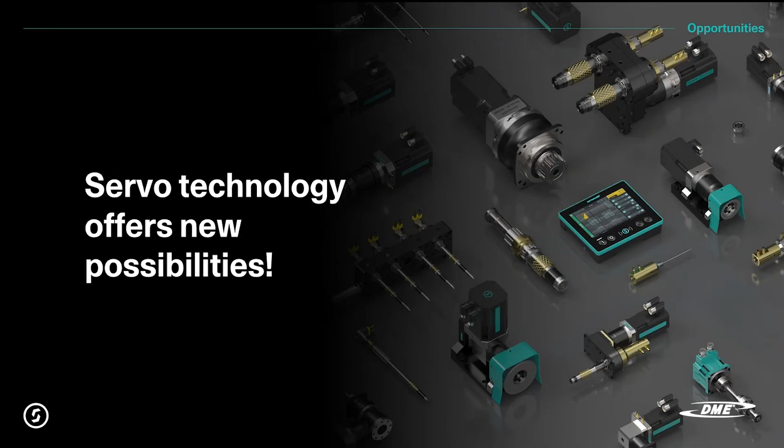We help you at the very beginning. Now, obviously, those of you who are already customers of ours will already know about the support that we can give. But those who don't, and particularly those who perhaps haven't used servo yet, or they're using their own servo, buying their own servo motors, building their own gearboxes, building their own cores, rack and pinion systems, or whatever.

What is it that makes us so special? Why should you actually come to us instead of doing all the design yourself? Well, firstly, we will support you in the actual...

...decision of exactly what unit, what size, what design, what concept to use. There are many, many ways—those of you who are in mold design will know yourselves. You can design a mold to make one particular plastic component in 10 different ways easily. They would all work, but you need to find the most efficient system. And we are there to support you, help you make the decision for which motor to use, which gearbox to use, which concept.

Do you want a rack and pinion to unscrew cores? Do you want a gearbox? How many motors should you have? We'll make the calculation at the beginning—will it work out exactly the demolding forces required?

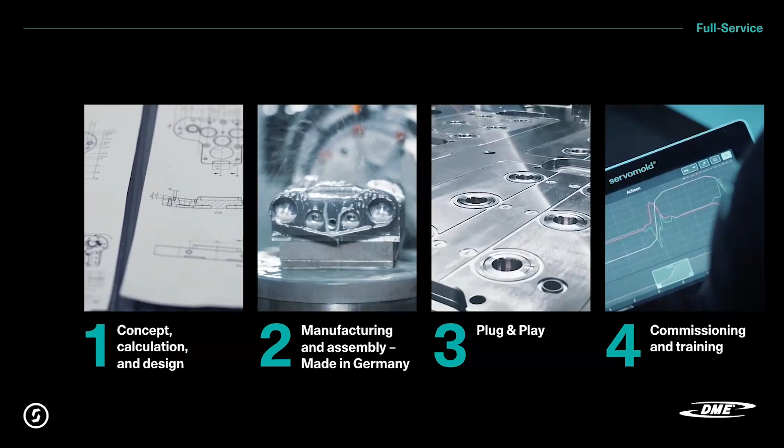The second point is manufacturing and assembly made in Germany. We're very proud to say that all of our gearbox equipment - and at the end of the day, this is really what we do, we marry together an electric motor, a spindle system, with our gearbox. We have many, many varieties of gearboxes, and that's what we do best, this is what we make the best of. We make these gearboxes in-house in Germany, in a little village called Erbach in Odenwald. You can look it up on Google Maps to find out where it is. It's very easy to get to, as long as you don't mind driving through lots and lots of villages. But we make everything there, and all the components that we fit to our gearboxes and attach to the whole system is purchased in Germany.

It's Germany or EU. Of course, we can't always guarantee bearings, seals, where the actual company we're buying them from, where the manufacturing is, we don't really know. But we have close contact with all of our suppliers, and intimate contact with our suppliers over many, many years now.

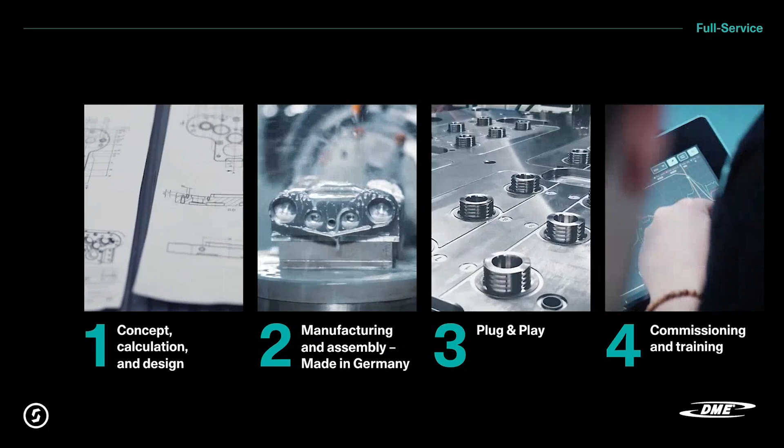Third position, plug and play. It's a very well used expression, and I think we all know how that can be - plug and play when you buy yourself a printer and you plug it in at home and it doesn't usually play. We really do endeavor to give you plug and play, but there are always anomalies.

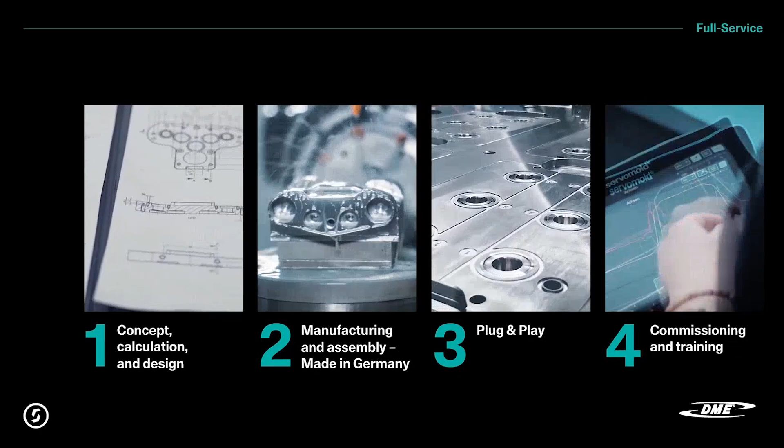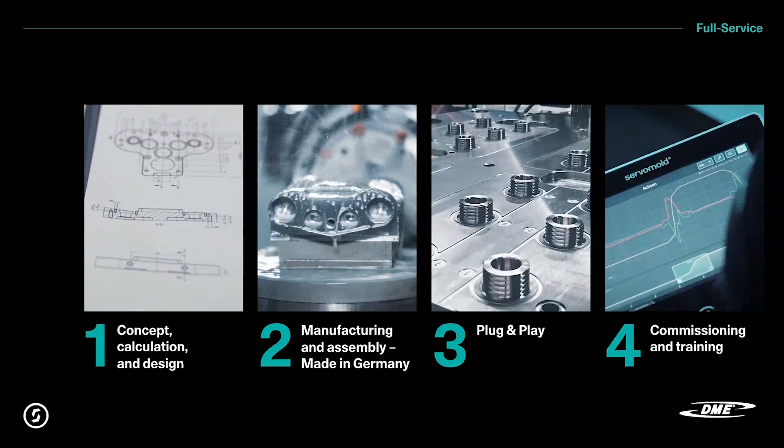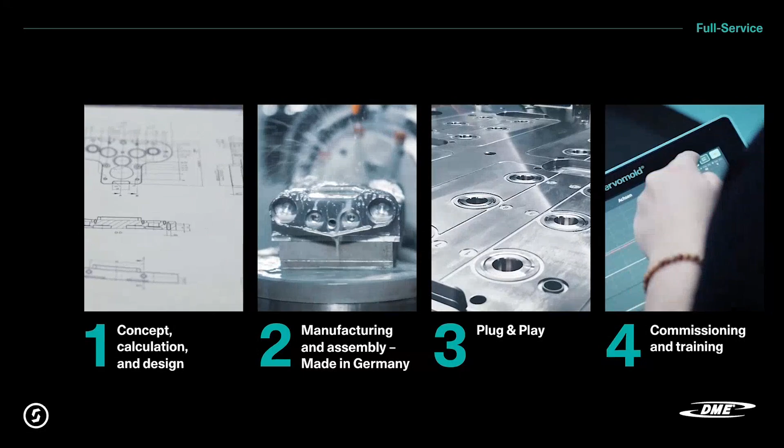There are always applications where you're going to need support from us, which takes us to number 4, the commissioning and training. This can be done through DME. DME have engineers who can support you in-house, they'll come to your factory, your mold shop, or your molding shop, and help you commission this system and get it up and running as efficiently as possible. On top of that, we can also support you online. We'll do Teams calls, we'll have cameras set up, and we can help you set up your system as efficiently as possible and give you the support that you need at the very beginning of what would be, in your first idea, quite a complex system.

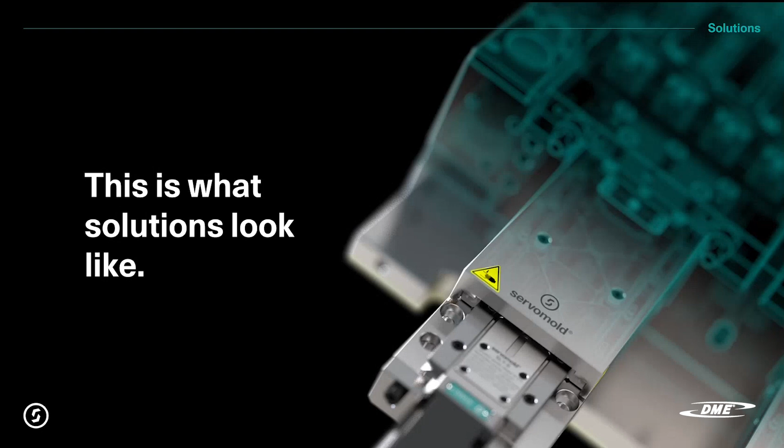Now that was the overview, and I want to go into a few solutions that we have. But at the end of the day, whatever solution it is, we're aiming to deliver 3 results: precision, repeatability, and simplicity. For any movement that you have in an injection mold, we don't want to make things more complicated. We don't usually make it cheaper, and I really need to point that out.

You don't buy an electric system instead of a hydraulic cylinder and think you're going to save money, you as a mold maker. The end customer, your customer, they will save money, they will save a lot of money. This is the position where you need to be, and this is where we want to help you understand what we've got and help you explain that also to your end customer, the molders - what are they getting with these systems and these solutions?

So first off, we've divided our offerings into 3 subsections. We have the linear actuation - this is the movement of slides, racks on a rack and pinion system. We have unscrewing rotational devices - this can be unscrewing cores, this can be index plates, anything that needs to be moved in a rotational manner, that is our second section. And then, equally as important, and without it the other 2 aren't really going to work, is our controls, controllers, control systems - all of it from us.

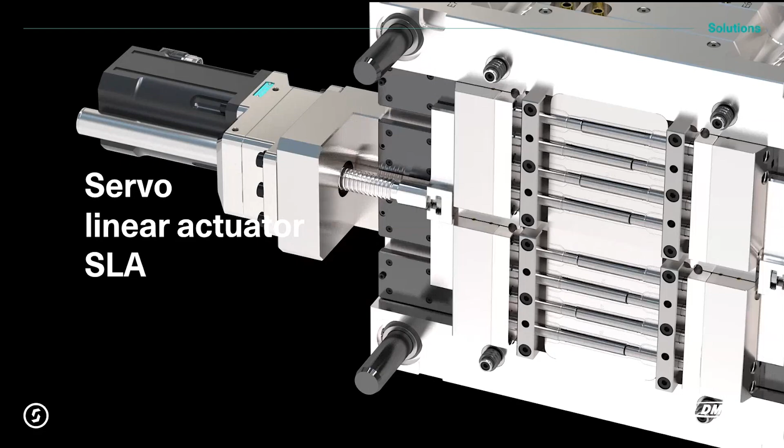I'll kick off now with linear. I'll let this little video run a bit, hopefully it will smooth up on my laptop or my screen here. It looks great, but it's got to go a long way - quite a few kilometers for it to travel until you get it, so hopefully this is smooth, at least on the second or third loop. But what we're showing here is, and it's quite a simple acronym, SLA - servo linear actuator.

So you have a servo motor, you have a gearbox, and you have a spindle. You can do anything you want with that, or whatever you think you need to do in an injection mold. We're showing here a very simple slide movement. This can equally be done with a hydraulic cylinder, of course - nobody would say, well I'll take the hydraulic cylinder off and put an electric motor on because it's fun. There's got to be a reason for doing it, and the reasons are very, very clear.

If this mold is running in a clean room, then the electric motor is going to be a no-brainer. As a molder, you're going to demand that. As a mold maker, you will be demanded to use servo electric for your slide movements in clean room facilities.

We're seeing a lot of customers worldwide who are buying more and more full electric injection molding machines. Unfortunately, there's the odd application, and I hope I don't step on anyone's toes here, where they've bought a very nice full electric Fanuc machine and fitted a little hydraulic pump underneath to keep their hydraulic cylinders running. This is a low investment, and I completely understand the motivation to do this. Long term, it's not the best solution.

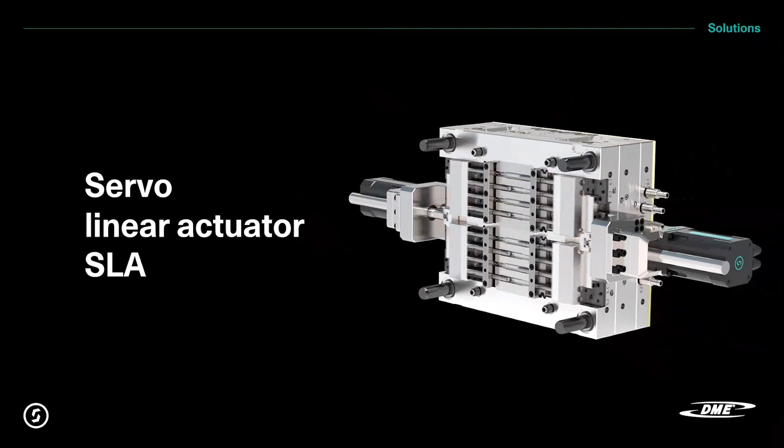We've done this with many of our distributors worldwide, where we've supported and explained in detail to the molder what they're getting, and then they're far more willing to make that jump to full electric. And I'm absolutely convinced, and it's happened time and time again, once a molder has made that jump and moved to electric, they won't go back to hydraulic. This is the way forward.

So enough of me ranting on about why. What we've got now is an SLA—and again, just came into my mind actually, I don't want to just carry on blabbing on. This is an overview.

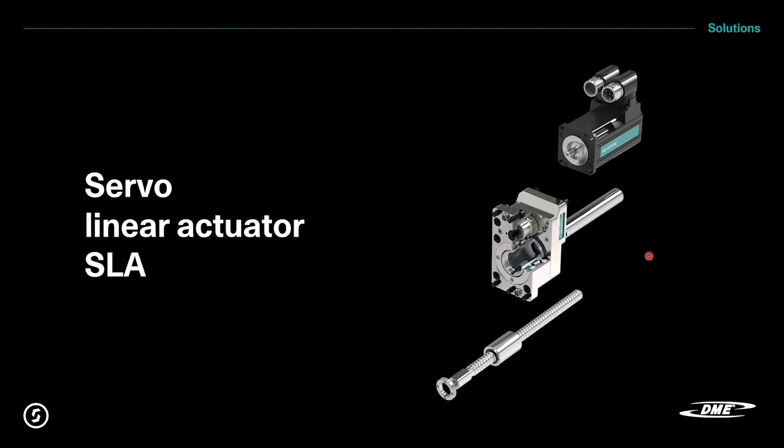So, as I mentioned, we concentrate on what we do best. This is the gearbox, the actuator itself, and this is an example of one. There have been many updates of this particular unit. This is nearly the latest one, but I can't keep up my presentations with the very latest, though I will be updating it. As far as the presentation is concerned, the concept is identical. We just have a few small iterations, but we're always trying to make the units we build as efficient and as low maintenance as possible.

The goal in building gearboxes like that, and this is where we are specialists, is to make these units as low maintenance as possible. What's low maintenance? Obviously, as everyone always says, it depends on the application. Of course, that isn't the answer you want to hear.

But if you're running in a clean room, for example, and you're moving a rack and pinion system, a couple of million cycles is easily within reach before any maintenance is needed. If maintenance is needed, many mold makers or molders will put down a mold service interval anyway, usually before 2 million cycles are up. Then a little bit of greasing will be done. You don't need to take these things apart, just do a little bit of oiling on the spindle nuts.

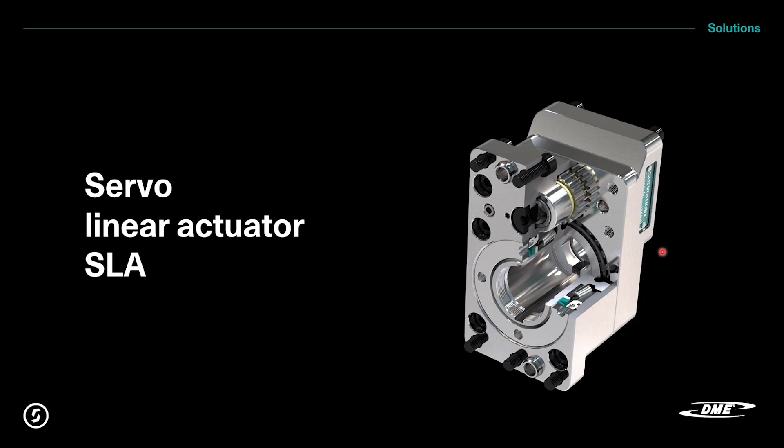We were approached a couple of years back by a large medical device manufacturer here in Switzerland. I'm actually sitting in Switzerland now. They were building molds with a lot of lift and strip concepts. Now, most of you will know what I'm talking about here. It would be a tubular plastic component, anything between maybe 40 millimeters and 100 millimeters long. These parts are usually within the body of an auto injector or a self-injecting device. This particular customer approached us.

We've been setting SLAs to move the slide. As you saw in the previous video, we attach it to the side of the mold to move the slides in and out. This particular customer said, yeah, that's all very well, but I still have to make the slides. There's a lot of parts in a slide to make it really accurate, with no free play, but it still needs to move, which is really difficult. And they wanted high accuracy for the cores, always in the exact right place.

We put our heads together, Servomold and this customer, and we came up with the servo linear actuator, the SLY. I'll let this video run a couple of loops, feel free to look at it. There are a few intentional design features put in here, not errors, because we have NDAs with our customers. We can't say exactly how mold designs are done, but we can support you, and we would need to support you.

You would require our support when using one of these SLYs, servo linear actuators. Now I'll move my laser pointer in here. As you see, you have a core retainer at the top.

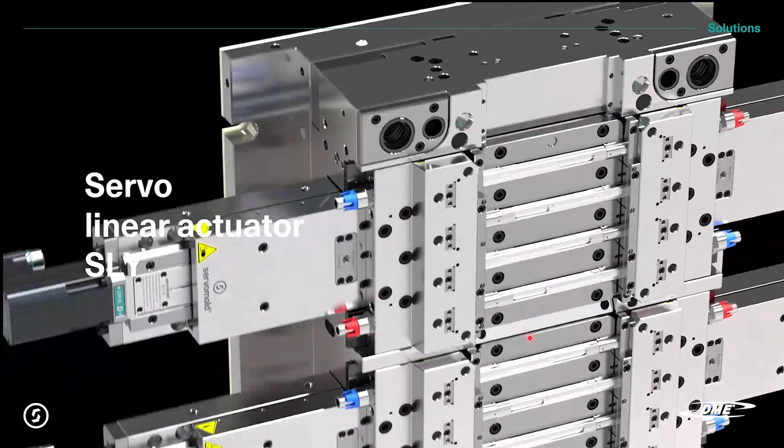That core retainer, obviously, we're using different length cores. We've got a short core on the right, long core on opposing sides. This was for reasons of balance, and demolding forces. By doing it the way it's designed, as you see in this loop, the forces for the left and right hand SLY are always going to be the same. It isn't that we have all long cores on one side or short cores on the other.

These are details we can talk about if this is something you think could be of interest to you. I'm a tool maker myself. I studied as an apprenticeship as a tool maker many years ago. I've been working in the plastic injection mold industry for many years.

The standard way for these sort of components would be to stand them up and put them in what we say in German, a form. This is basically slides, a left and right slide, with the part standing up on a core. You inject the part on top and then have a very long ejector sleeve pushing the part off. This makes for a very large mold, a lot of moving parts, and a lot of maintenance.

Not really the best injection point. Those of us in the injection molding industry know that the nicest place to inject would be as the part lays down on its side, on a thicker area. Particularly here, you can see we've got a very close cavity pitch. Sometimes if you have a needle valve system, you can't get such a pitch, and that's another reason why we've gone left, right, left, right. We've actually staggered the injection points so that the hot runner system is also staggered.

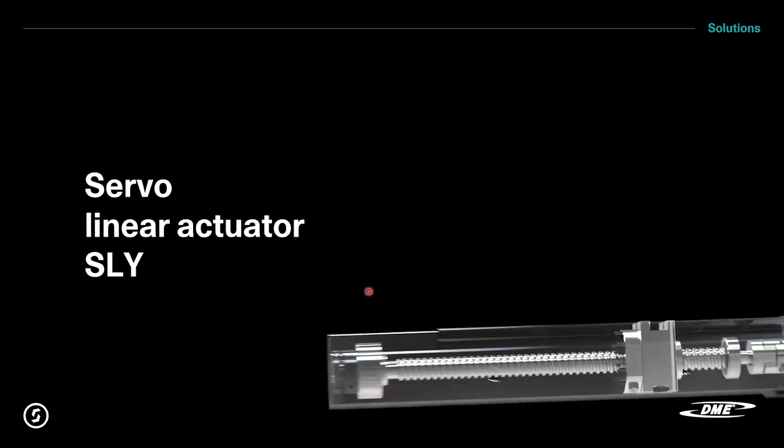We have a nice push drive driving that spindle. The spindle is retained at the front over another bearing, so it's very well supported on both ends. Attached to the nut, and to stop that nut from turning—otherwise if you just turn the spindle, the nut will go with it—we need to stop it. That's this nut retainer you see now, moving up and down a machined area in the bottom unit.

The top slide is attached and runs on needle bearings, supplied by the company Schneeberger here in Switzerland. They're preloaded bearings, so it's a preloaded guide. Because it's preloaded, there is no free play. The top slide running along that bottom slide has zero free play. We guarantee the position of that top slide on all areas to a maximum of ±8 micron runout.

Why does it need to be so accurate? Well, the idea is, if you have a lift and strip mold, you're pulling cores out of a cavity after being lifted, with parts being stripped off over a bush. There's no huge requirement for such high accuracy there.

However, when the mold is closed, when the mold is on its back on the workbench and you're fitting the whole mold, those cores need to slide out extremely accurately. The advantage of having these cores moving so accurately is that your core is pulled out with zero deviation, causing you very, very little issue.

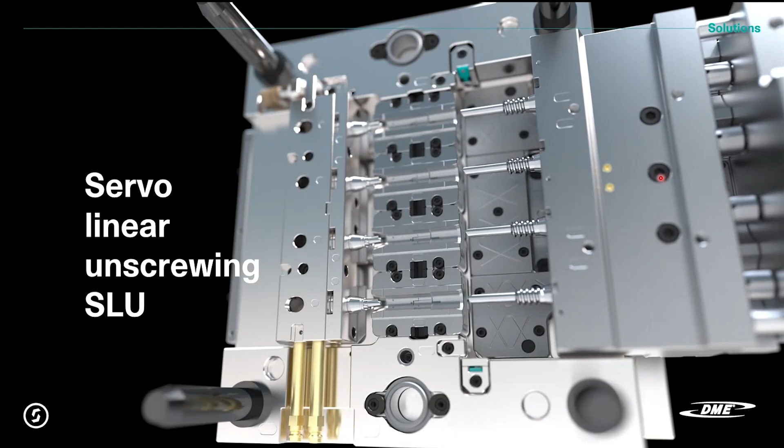So yeah, okay, you can do an unscrewing system, but we were approached and told it's got a rather nasty thread, and also the shut-off between the long core, which you see here, and the short core - it's really complex and quite delicate. With any unscrewing core, one of the challenges in unscrewing devices, which I'll get to in a few minutes, is positioning of the core.

As you know, the rotational positioning, the radial position of that core, the start position of the thread - usually if it's just a flat surface shut-off it's simple. But if you have a profiled shut-off like we had here, those cores have got to be extremely accurately positioned, which made the design of the unscrewing system extremely difficult and very maintenance intensive.

So we built this in conjunction with our partner, this 4-cavity prototype mold. This is the prototype - we're going to 16 cavity after this, but it was a prototype to find out, can we do this? We took an SLU, which I showed you before, and that sits underneath this top slide. On the top slide, which is the exact same top slide to any SLU unit, top and bottom slide, you see them very clearly here, we fitted what we do best - a little gearbox.

That gearbox is extremely simple. All it does is rotate the cores, nothing else. It holds the cores, and actually keeps them in a cooled core system, which I'll show you on the next slide, where we managed to have cooling inside this rotational core as well. But it gave us a massive advantage of being able to say, okay, these unscrewing cores, all they're going to do is rotate, nothing else.

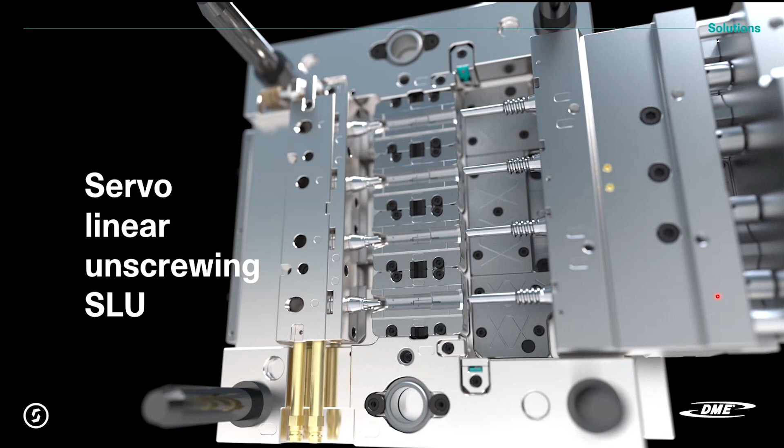And if we're only going to rotate them, then we can position them extremely accurately. They're positioned over a gearbox, so they can't move. They can't have a clamping plate where I have to adjust my core to a certain position because of a certain height. All the cores are identical length. Our gearbox core holders are identical lengths. Everything's the same. I'll move on, which shows a little bit of a cutaway here.

So now you can imagine you've got our SLU here underneath, bottom and top slides moving in and out. This gearbox, all it does is rotate these cores. While it rotates through electronic gearing in our servo controller, we move the top slide back at the same time that it rotates. Thus, we have our pitch. The gearbox at the top is always the same position - all it does is rotate. And then we pull it back electrically with gearing in our controller to make our pitch.

I'll go back to the first picture because there's something quite interesting when this runs. Hopefully it will run - all right, I've got to press a button here to make it run. Yeah, I can't make it run now. Bear with me, I'm going to go back another slide and then jump into that one, and that will make it start up again. So it's now running again.

You'll see that the actual rotating movement only happens when we're unscrewing. The second it's unscrewed out of that thread, we can speed up and pull it back - we just pull it back linearly over the SLU. We've programmed it to know exactly when that thread starts and stops, when it starts to turn and when it stops to turn. These are independent movements to the linear movement. We can control this.

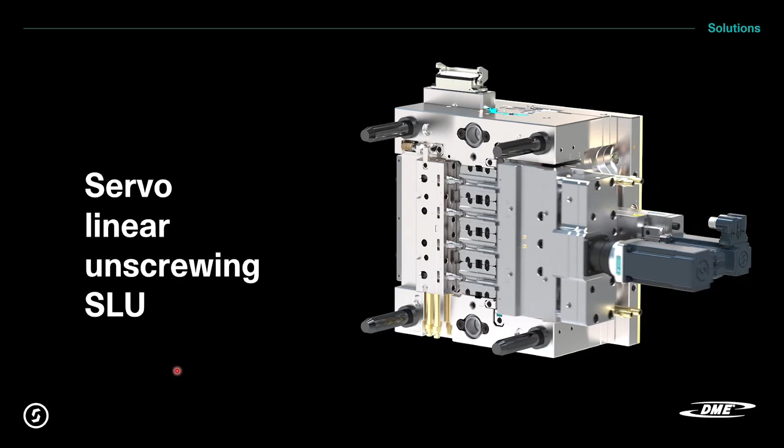This is the most accurate way of unscrewing a core. The more cores you have, as we all know, on a big mold, they all have to be on the exact same height, and if you have a profiled shut-off face, those cores need to be not only at the exact right height, but also in the exact same rotational position. This way, we do that.

Move back to here, and I'll show you again that the core holder - all of this is made by us in Germany. The white core you see here is made by the mold maker. That's what they do best - cores and cavities. Leave us to the gearbox and the electronics.

It's cooled - you can see here we have cooling. We have what we call a bell around the outside of the core holder. This is flexible. We show here only 4 cores, but you can have 8, as many as we can fit onto a SLU slide. We can make a wider SLU slide to accommodate more cores. The gearbox just gets longer because nothing changes.

We've integrated very stable - I've forgotten what I'm looking for now in English - bearings here, front and back. Angled bearings, I think, you guys will know what they're called. I've completely forgotten the name of them now. There's no adjustability on length, so therefore there's no margin of error. We've manufactured everything - this surface here is manufactured at a specific position.

They're all the same - it'll be a position to your shutoff. Then you make your cores. Obviously, as you can well imagine, there's a lot of communication between ourselves and yourselves when a project like this is started up.

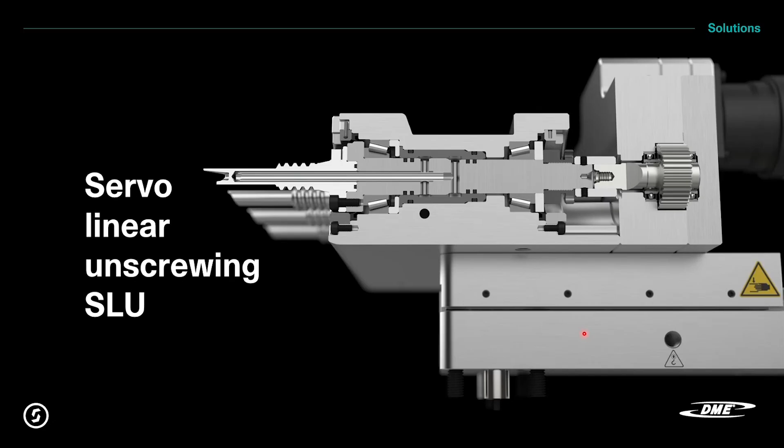I've got another 10 minutes. So, unscrewing units - this is basically where Servomold really started. This was like the grassroots for Servomold. We started this many years ago. The founder of Servomold, Thomas Meister, came up with this idea - unscrewing devices mustn't be so difficult as most people tend to think. There's got to be an easy way around this.

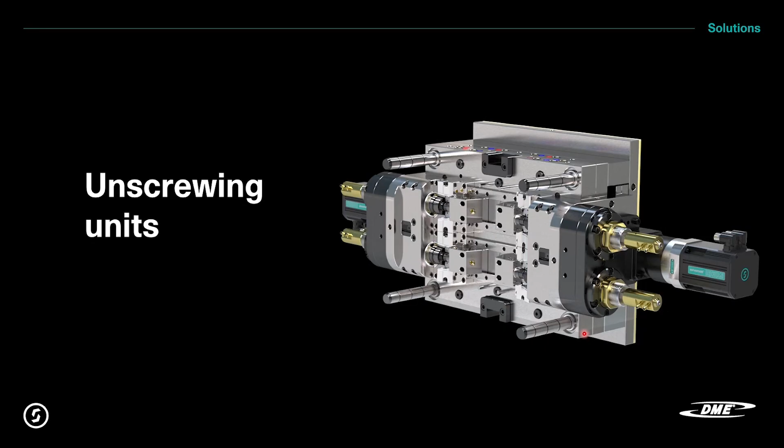I've got a nice little video here showing a mold that we built with unscrewing units. You can see here two of what we call SADs - they're a servo Ausschraub double, because there are two cores. But more importantly, this slide shows the threaded core systems.

This is our patented self-centering drive system for unscrewing cores. Every unscrewing unit or unscrewing device, whether it's a single unit or a huge mold with 64 unscrewing cores, always uses the exact same principle that we're showing you here. They can be bigger, they can be tiny - it doesn't matter what size. The principle is always the same. The concept is the same.

And that concept is very simple, as are most things that are extremely good and well trusted - a simple design of the gear wheel at the back. This is your drive wheel. This is either attached to a gearbox, driven by a gearbox, or driven by a rack, whichever system you're going to use - but this is your drive. That drive wheel is clamped and supported by two ball bearings in between the closing plate, so that gear wheel will spin freely but will not move in any other direction other than rotational.

Therefore, any pressure put on it by another gear wheel or a rack is all taken up in these bearings. We have a patented rib profile inside here, where the gear wheel goes over the lead screw. Through this design, the minute the gear wheel is driving that unscrewing core, it's pushing it into the center. By having the unscrewing core self-centering, you can imagine this gives you extremely low wear and tear where it matters, and that's over the lead nut.

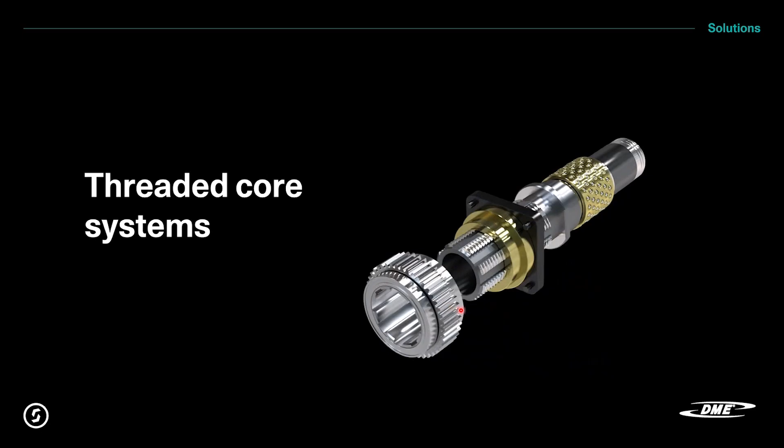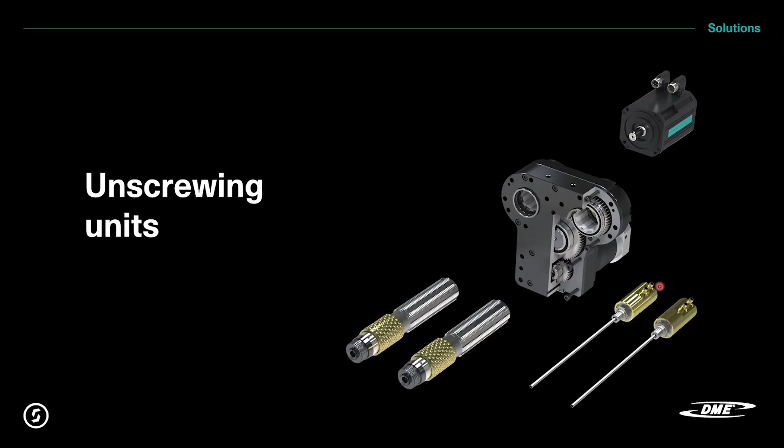This is a little breakdown of the double unscrewing device that you saw at the very beginning. We also show that we can supply rotational cooling units to go with it, but it's always the same design. We have here exactly the same patented design, but this time, instead of pulling these cores back - this is just another example of how one can unscrew.

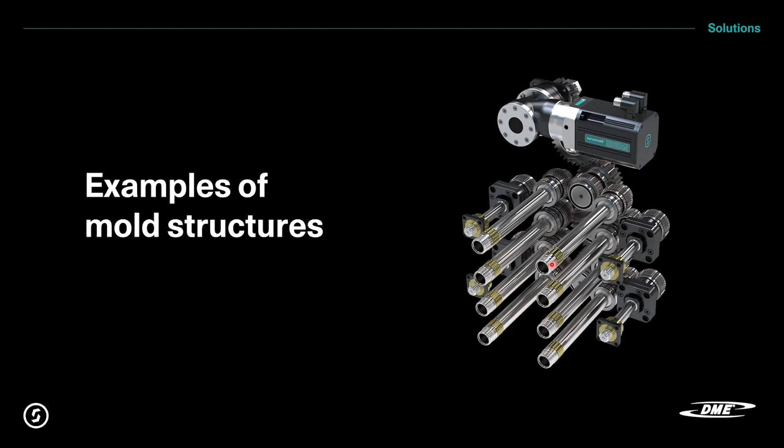There are two main ways really on a standard stand-up unscrewing system. This would be a traditional system for caps and closures. We drive the gears through the motor here, but then over the gear wheels, we drive these pillars in our patented unscrewing system. We drive the ejector plate forward at the exact same stroke, same pitch as the thread pitch on your cores. This would be the unscrewing method where cores are always the same length, always in the same position, far easier to adjust as far as shutoffs are concerned. And the ejector plate moves forward.

Alternatively, we go back to what I showed you at the beginning. We have a gear wheel driven by our motor at the top through idler gears, with gears at the back. All these little gear wheels are held over roller bearings, clamped between the plates, so all the sideways pressure is taken up by these ball bearings. We have a clamp plate holding the lead nut, allowing our cores to go forward and backward in an unscrewing movement.

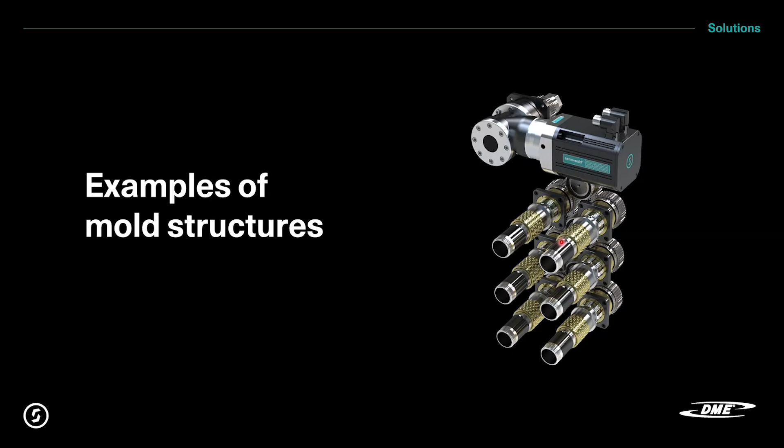I'm going to move on relatively quickly because time is running out and I don't want Mark to suddenly kick me out. I love this picture because it's a particularly simple looking mold - it's a 48 cavity luer lock, really standard in the medical industry. Luer locks, luer cones are standardized around the world with loads of different applications using this thread. This is a 48 cavity one, and we've made lots of molds identical to this.

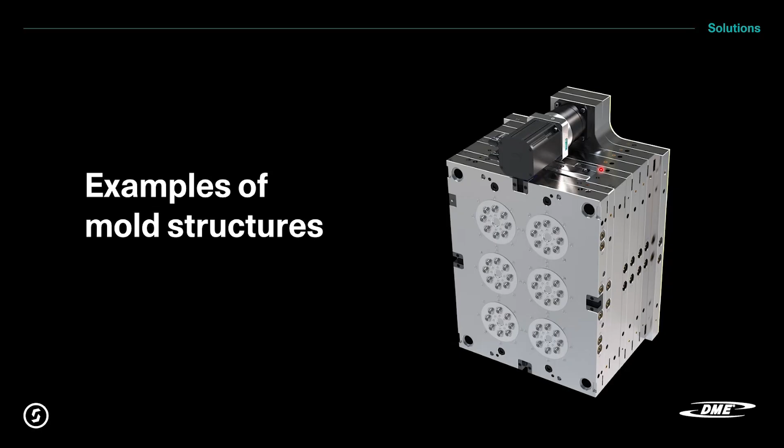Cores come down to where our patented system comes in - it's usually then a two-piece core. So that gives you an idea of what's possible. This is 48, but 64 is also possible - makes no difference, it's just growing up from what we've already laid out.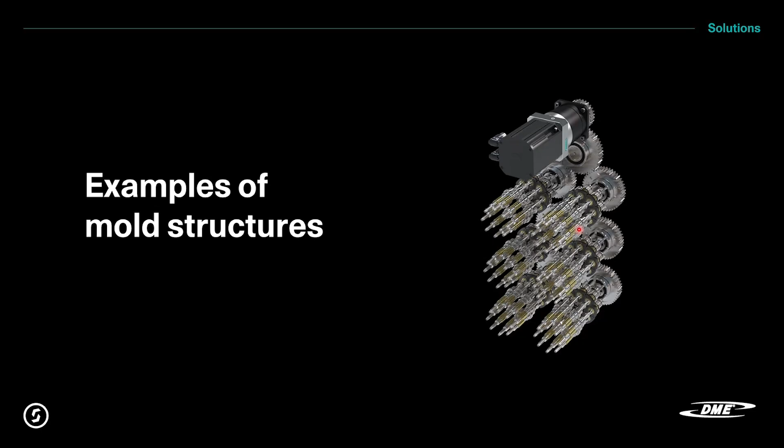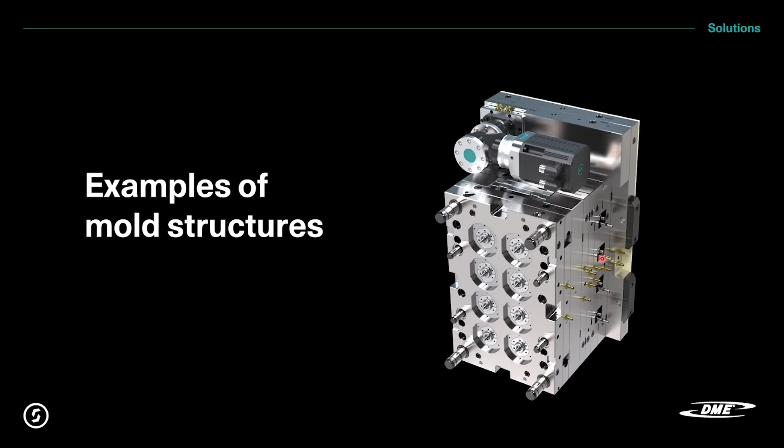It's a standardized system. Another small example of a mold structure showing an 8 cavity with cooling. You can see now when you take the plates away, the cooling we've got down the sides of the plates is going to the unscrewing cores. So these cores are also cooled, again with our patented system here, holding the lead nut and lead screw in position.

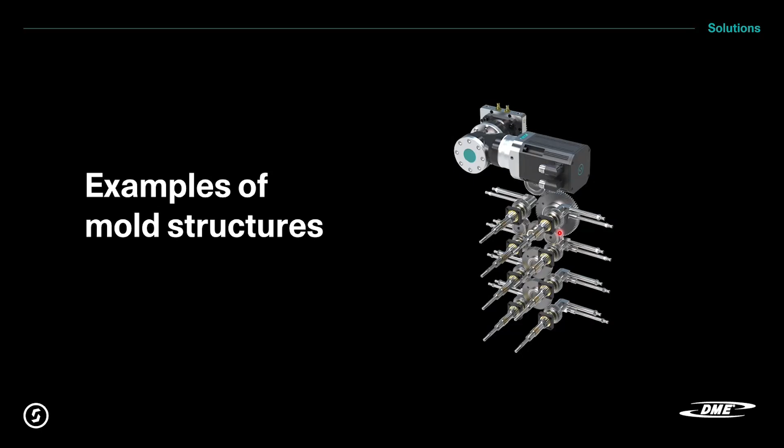Now, coming to the end, we can all relax. I often get asked - people say they really like this system, it looks really cool, we want to go with this - how do we actually switch it on and off? You've got to have a controller.

You need a controller. I've got this loop running here, and basically I'll stop it now by clicking on that. What you got - well, it didn't stop. Okay, no worries, I'll let it run.

What we have on offer at the moment are 3 standardized sizes of controllers. We've got the mini to the far left, which controls 1 motor but can have up to 100 programs. So if you've got molds that only need 1 motor, but you run that mold over 2-3 months a year, and you have other molds with unscrewing devices or index plates, you can use that same controller for many applications - it's just a different program. We'll supply the program, and then off you go.

The second size, to the right of the mini, is the standard. That will take up to 4 regulators, 4 controllers for 4 motors - up to, I say that on purpose, because you can buy it with just 2. If you don't know what's going to happen down the line, you could end up with other molds needing 3 or maybe 4 - these are upgradable. You could start with 2 or even 1 if you know it's going to need more motors down the line. At the back is the rack, which will take up to 8 motors, 8 regulators or amplifiers.

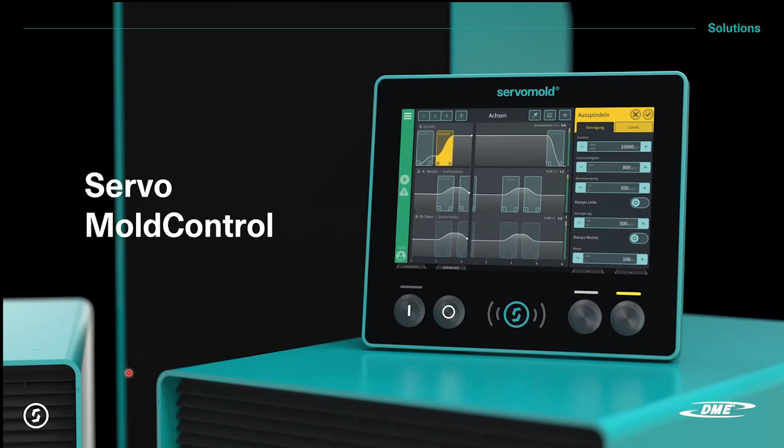As far as Servo MoldControl is concerned, we have new developments coming up for the end of the summer, but I'm going to keep that to myself. Hopefully it'll be of interest to you to come and listen to me ranting on for another hour, or maybe I'll keep it a little shorter if we concentrate on one particular unit. But just at the very end of my presentation, to give you an idea of what industries we're supplying most - obviously medical and pharma has been extremely important the last few years.

Nevertheless, packaging, electrical, fluid control, automotive has not gone away. We're still supplying it, and it makes no difference to us where that mold or unit is going to be used. We're not selling specifically or trying to reach out to certain industrial markets. It's whoever needs a clean, precise movement within their injection mold. They need to speak to DME first, and then with us.

That's quite a number. That is really an impressive number of control units. There are very few suppliers of pure control units - you don't control a hot runner with this on the market. I don't think anybody has built that many and has that amount of experience that we have.

So I really will now bring it to an end. We're partnering with DME now for many years - I think it's actually more than 5 now. I think it was 5 on the first webinar I did, so it must be about 7 now. I should update that for the next one, Mark. So by all means, feel free to reach out to your representative at DME. They'll get you in contact with us, and let's talk about updating your mold designs to servo.

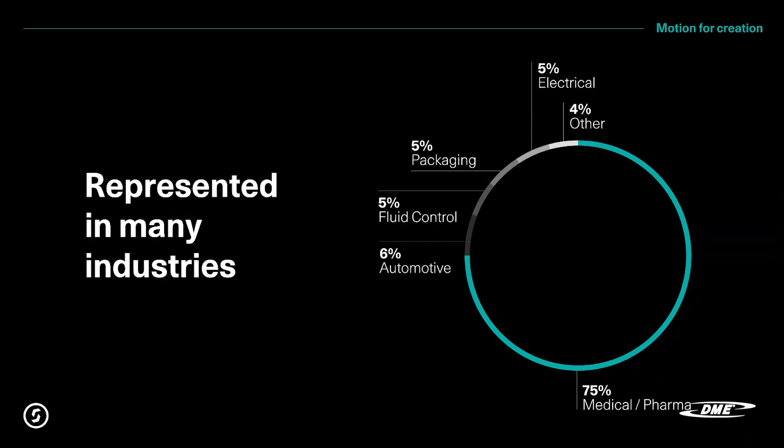Another question: how many levels of security are there for program adjustments, and are they adjustable? As you saw on those slides on the controller, right here in the middle, that's the Servomold logo, which is also the position for an RFID chip. There are 3 chips, on different levels. You can program them how you want, and by programming which level a chip has, you can ensure the user a certain amount of access into the program. That is the security.

Okay, perfect. This will be the last question, because I don't want to keep everybody too late. Again, if you have questions, let us know and we'll get back to you. The last question we have is, do you have a general user manual for the controllers?

Yes, we supply a manual with the controller when we send it out. We've been working a lot on these manuals lately. My colleague Daniel and his colleague Sebastian have been doing a lot of work on that to try and make it as interactive and easy to understand as possible. I'll be the first to admit, the minute I see these things I get a little scared, it's all touchscreen, you can move stuff around. I'm not the expert on controllers, but you get the support. It's a manual, it's online, it's a PDF, and I believe you can actually download it from our website, the manual for the specific controller you've ordered. That's always available. Yes, correct.